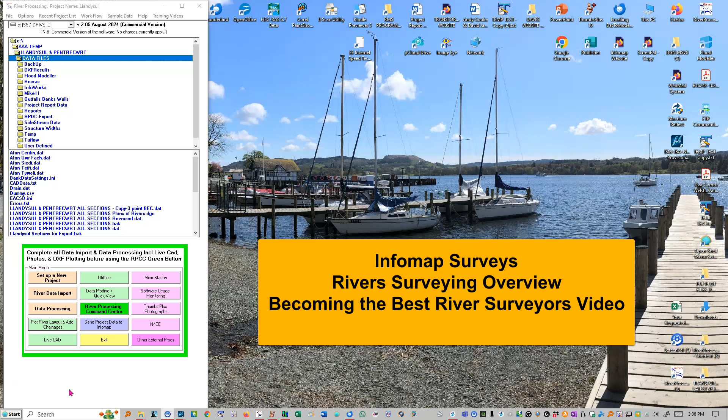Here we are in the Infomap surveys river processing software. But before we do anything or look at anything, I really want to try and help us understand why we're here, what we're doing, who it's for, and where it all ends up.

And I want to go back into the wonderful set of rivers that David James and I did down at Llandysul in Pentrecwrt, an intricate connected catchment of 8 rivers. It's just coming in now, there we are. And it included the main river Teifi all the way up through there, through Llandysul, and all the way up, wandering all the way, coming from right at the top there.

And these 8 side streams, some of them are quite significant, some of them quite small. The little drain that they needed surveying, coming out of a playing field on the right and going out into the river there. How on earth do we start thinking about this? Well, the software was built up over a number of years based on the client's needs.

Modelers, the sort of consulting engineers who have used us, would be people like W.S. Atkins, they're now called AtkinsRéalis. Binnie Black and Veatch, they're now called Binnies. Mott MacDonald, JBA, Jeremy Benn Associates, Edenvale Young. These have been our major clients. And the main thing we've got to try and think about when we're surveying rivers is who is our client and who is our client's client. That's the first thing to think about.

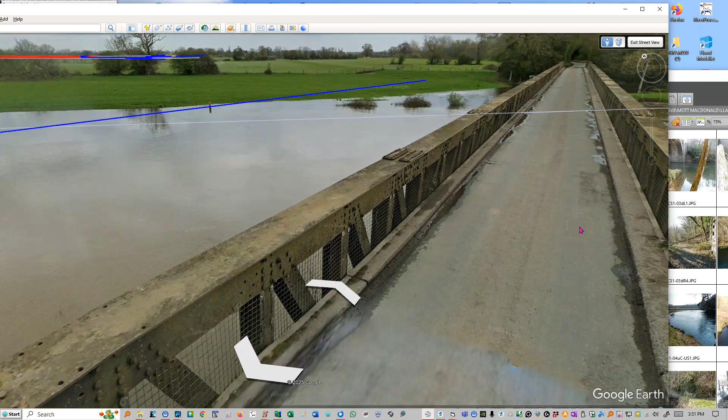Whilst we're talking about structures, on the Severn Vyrnwy, or the River Severn survey, there was a bridge that was an old railway bridge. You can see it here. It was converted into tarmac road. It was going into, I think, Criggion quarries. So it was an industrial line. But here the bridge has been repurposed for a road. But our interest is, how does the River Severn get through it? And you can see the steel girders here with these cross braces and so on.

Well, David and his merry lads managed to scan this structure, and then Justin extracted it in their software, getting it into here. Here's the structure here. And there was something like 109 openings, because in order to convey the real shape of the structure, we had to show it like this. These were concrete supports here, and the steelwork was all in there. Here's your upper steelwork. That line there is your parapet line, which in effect is the top of the steelwork there. The road deck in red was there.

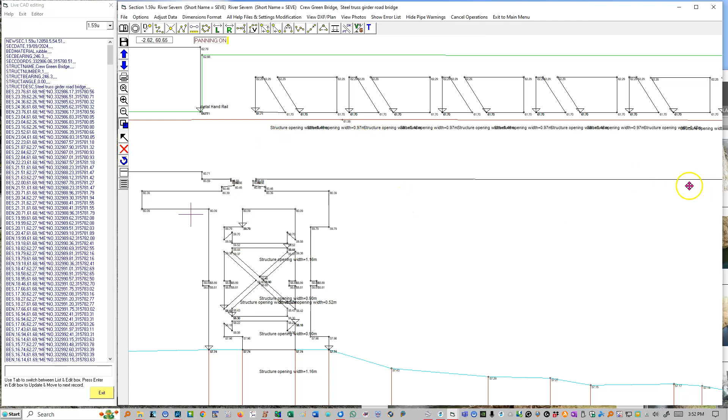And so they managed to get all this stuff here, and no one else had ever got this before. No one else had ever managed to define the structural openings of all this here. And Justin must have spent a day or two sorting this out. But it was vital for the client to have this data.

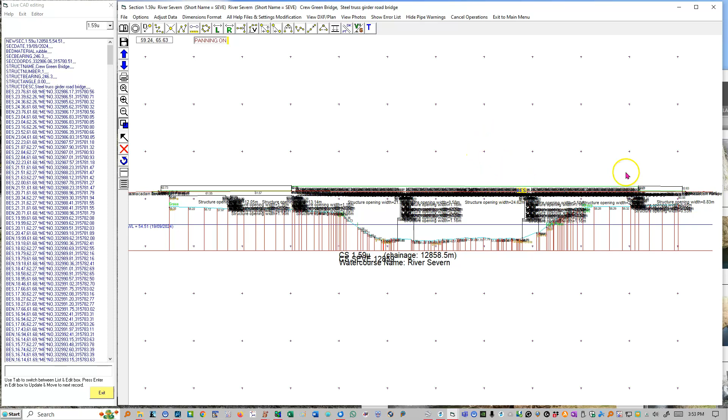So that's how we surveyed that. Even the handrail at that point there, you can see the slight opening of the handrails there. All that means something. But the fact was the modelers could then see where the openings were.

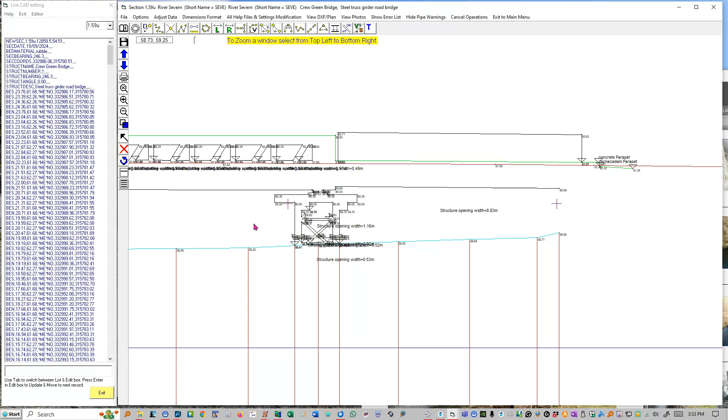And the parapet, I think this line here is the Tarmacadam parapet, that red line. So that was defining how the water would have to get over there, and all these openings then ended up in a structure width table. We'd never seen anything like it. So this was a very different project to normal, but they rightly judged that these were structural openings that water could and should pass through, and therefore the modelers needed to know it.

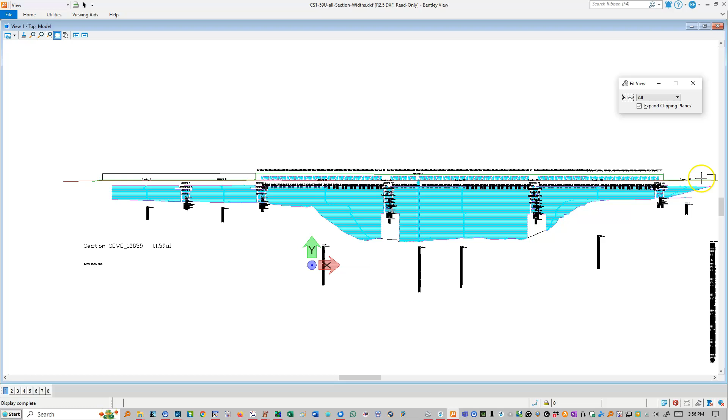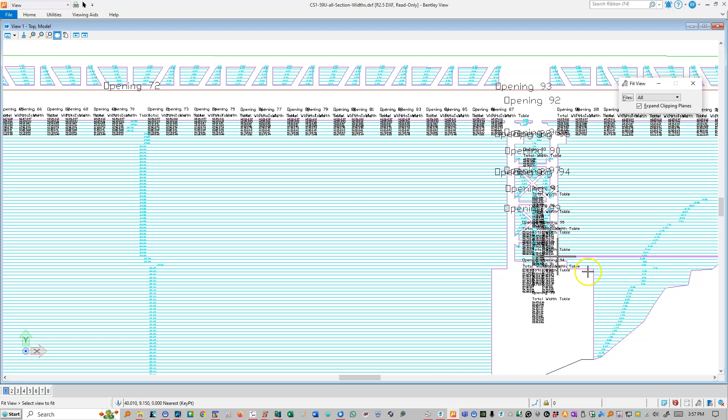So the software will work extraordinarily well, even up to the full amount of those sort of openings on a bridge. And all you need to do as a river surveyor is decide what is important. If we go back to the photographs for the other river, if I can find it. Shut that down. Yeah, here we are.

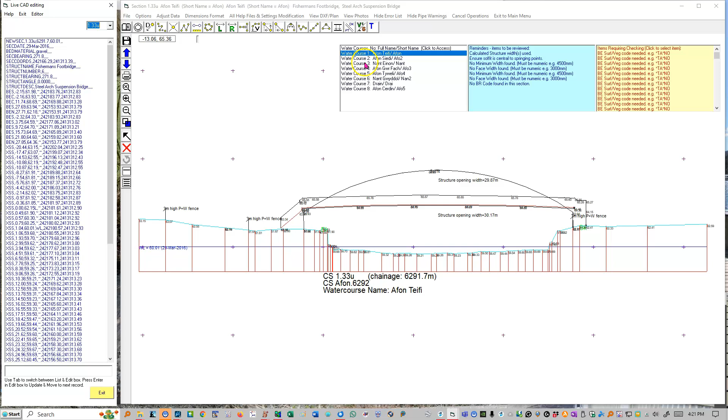Now in this case, I think I'm going to go up to the upper area where we've got some better structures. Oh, that's our little footbridge, fisherman's footbridge. I'm going to go into this one here, where I think we've probably got some better illustrative structures that we can use. If we wanted to resurvey this, we've got the top left of the parapet there, which is shown at this point here.

So we'd resurvey the bed. You've got the old survey data. You can cut and paste. You want to keep the old bridge data in this part of the file here. Keep that in there. You want to insert the new data from another DAT file, and you're then going to replace this. And when you get to here, you simply use adjust data and the bed profile to structure, which then asks you for the common lock point, which might be the top left of the parapet. I won't do it now. And then it will pull the bed profile across, in effect matching the two surveys, and it will come across like that.

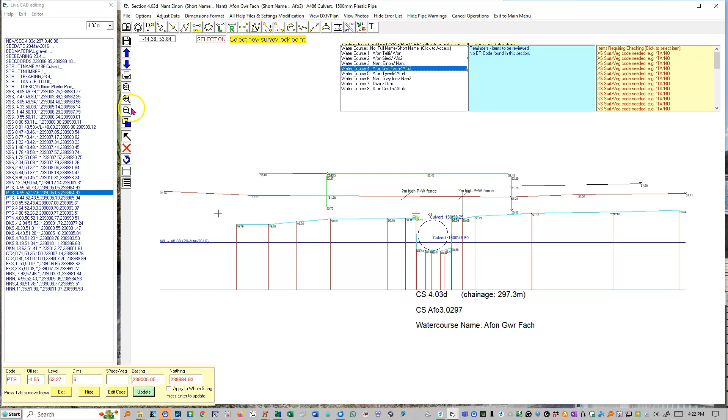Again, that's another example of the situation where you're dealing with all this stuff and you're doing your best, struggling through all sorts of muck and mud to measure the profile at a structure where you don't want to resurvey the structure, especially a complicated one. That's again another tool that we can use.

Okay, probably the near final thing I want to say now is that the modelers that you are providing your modeling data to, and you'll go into this in the rest of the training videos, 99.999% of the time, they will never ever go there. You are the eyes and the ears for the modelers and your clients. So therefore it's critical that you try and get as much information, especially photographic information, even video information, if you think that you can usefully inform the modeler who will be looking at all these photographs.